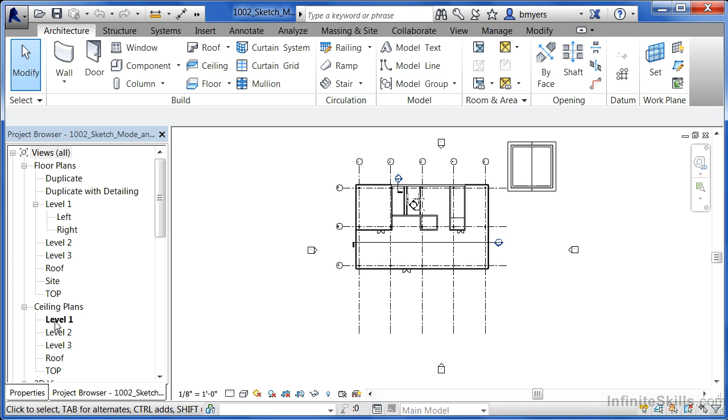Now, we're going to place a ceiling inside of this office area between A and B. To do that, we need to come underneath the Architecture tab and select on Ceiling. When we do, we need to look underneath Properties to see which type of ceiling it's going to place inside of the space. In this case, it's a 2x4 ACT acoustical tile system ceiling. Also, we can see the height, and in this case, it's 8 foot.

So if we place it in here currently, it'll be 8 foot off of level 1, or 8 foot off of the ground. In this case, I'd like it to be at least a little bit higher than 8 foot off of the ground. So I'm going to type in 9 foot, and we'll have a 9-foot ceiling inside of this office space. Now, if you move your cursor into this area, you'll see a red line showing up around the office walls. This is a good thing. This is where it's going to try to place the ceiling into.

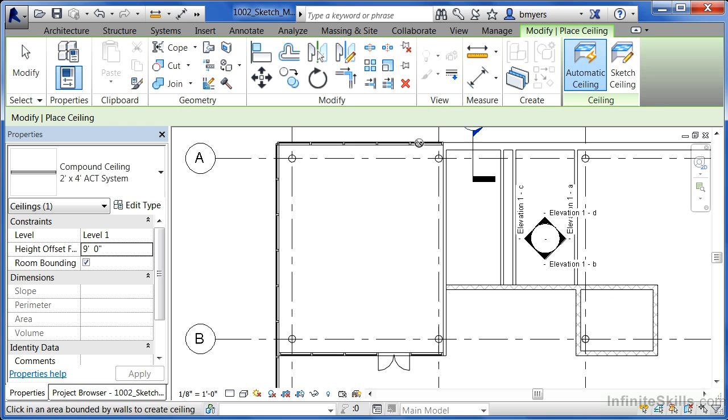Up here, you'll see this says Automatic Ceiling. What's actually going on here is that it's finding where those outside walls are at, and it's automatically placing this ceiling inside of this space. So it's making this decision for you. Do you want to place it inside of this space, or inside of this space, or inside of this space? In this case, yes, we want to place it inside of the office area, and by just clicking, we've now placed a 9-foot elevation acoustical tile system inside of the room.

Now I'm going to do the same thing, except over in these two spaces here. But these are going to be restrooms, and frankly, I don't really want to have ACT inside of my restrooms. I want a different kind of material. So I'm going to pick this gypboard material, the GWB on metal stud. And I'm going to change the height offset from being 9 foot to 8 foot 6. So we'll have a little bit lower ceilings inside of here. Now just click to place and do one more time over in the next restroom.

Initially, it looks like nothing has happened, but that's because in Revit, by default, and this can be changed, the gypboard ceilings don't have a pattern associated with them. Now, it can be assigned any pattern that you want it to have, so it looks like a bunch of little dots or maybe triangles or something along those lines.

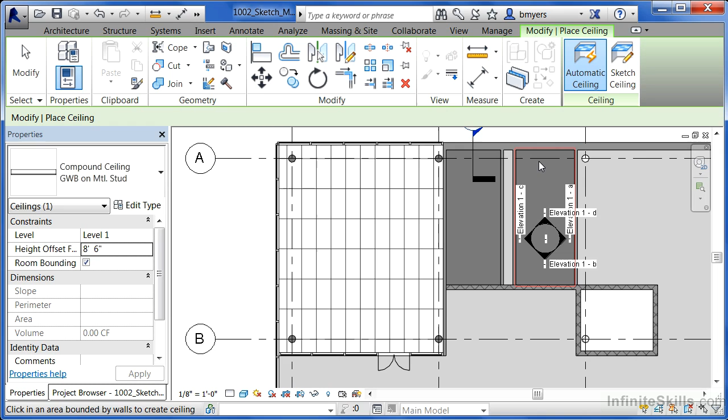But that being said, in order to see if these ceilings actually were placed, one trick is to move down here, highlight over Visual Style, and then change the visual style to be shaded. When you do, you should see this get a lot darker where that ceiling is going to be placed. As a result of this, you know that you're going to have ceiling inside of both of those spaces.

Next, I'm going to come over here and I'm going to select on yet a different type of ceiling. I could do the generic, or in this case, I think I'm just going to pick on this 2x2 ACT system.

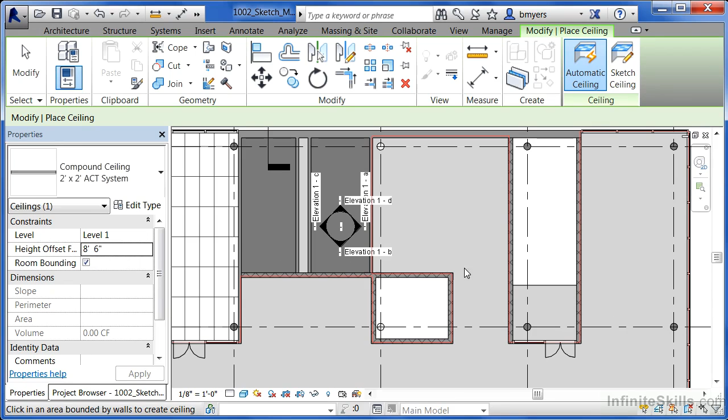And I'd really like to place it inside of this room, but I can see that I'm going to have a problem. I only want it inside of this space right here, not have it fill up this entire space out here. So to accomplish that, I'm going to have to sketch my ceiling in. So I'm going to come up here to Sketch and select on Sketch.

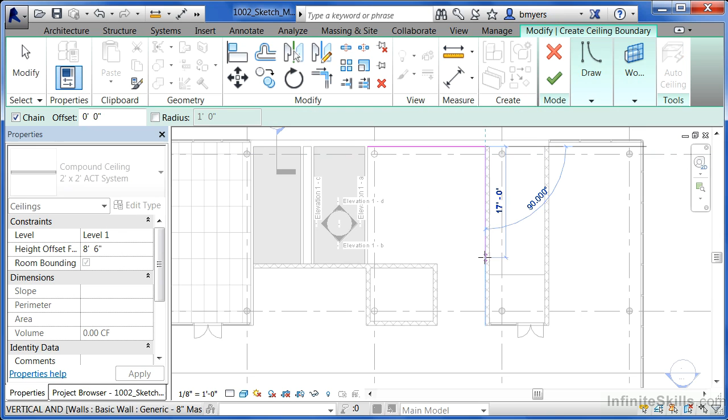Then I'm going to pick my Draw tools and use my line work to draw around where I want the boundary for my ceiling to be. One quick tip, if you move over here, just highlight over the intersection and move out, you'll get this dashed line. When you do that, you know that you're straight across from that wall. Move across, click, come back up, and click again.

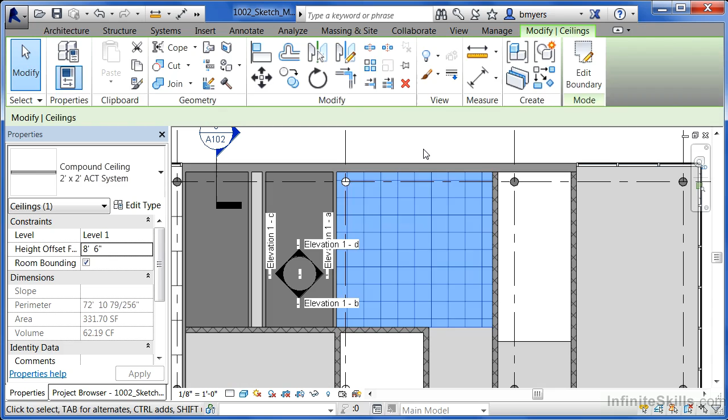Now at the 8 foot 6 height, I'm going to have this 2x2 tile put in here, and click the big green check mark to finish that off. I'm going to click out here in the white area, and now we can see we have ceiling in each of these spots. Now I'd like to go through the same process one more time, except in this case, I'm going to put a ceiling in this spot here, and I do want it to be gypboard again.

Going to do one more ceiling. Going to choose the GWB, the gypsum wallboard ceiling. And one thing of interest, you can see if I click right now, it's going to put a ceiling right into this space. The problem is it'll try to cover up this ceiling here. But really I have one of two different options. I can either use sketch ceiling and take the time to pick each and every one of these walls,

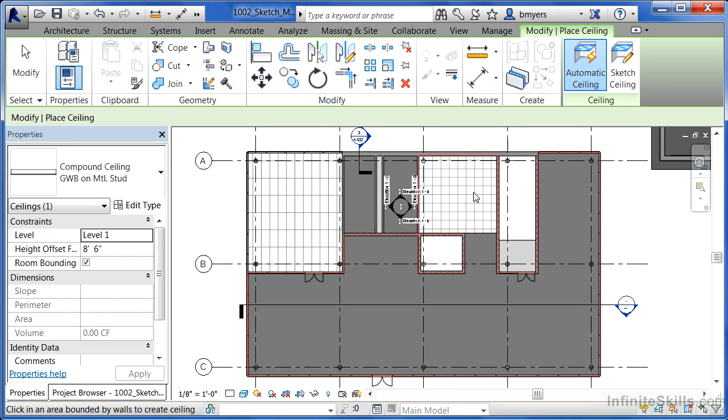or, to speed things up, choose the automatic ceiling, accept this height offset. 8'6" sounds good to me right now. Click right inside of the space. We can see this is all turned gray. But even though this pattern hasn't changed, I can tell you that there's actually 2 ceilings inside of this space. I'm going to hit escape right now.

Now I'm going to put my mouse over the edge of where I know a corner of the ceiling is at. And I'm going to select on the tab key to try to select my different ceilings. Now in this case, actually my ceiling is coming in here, so I need to pick a different edge. I'm going to pick the edge right here. I'm going to click the tab key until just that ceiling highlights.

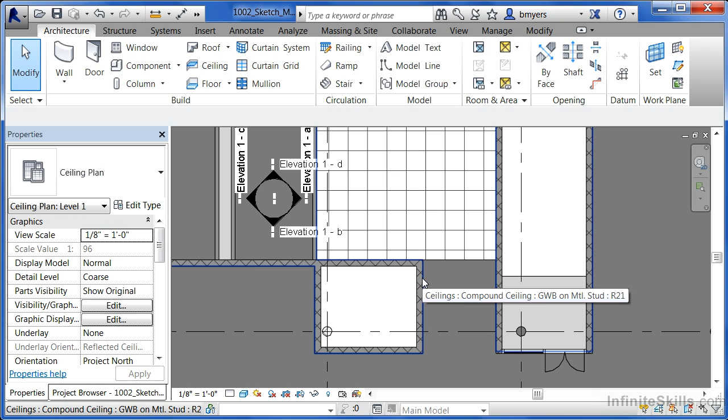And you can see that in the lower left-hand side of the screen, it'll say ceilings, compound ceilings on the gray bar going across the bottom. When you click, it'll highlight. You can then do an edit boundary to this. And at this point, it gets easy. Because all you need to do is use your draw tools, pick a line, and draw one line over.

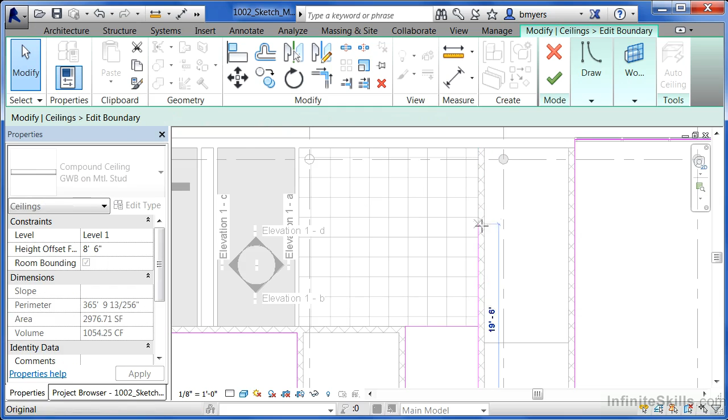Hit escape a couple of times. Highlight on each of these lines. Click the delete key to get rid of these extra lines. And with this final line, you can select on it, click the dot, and pull it straight down, and click the big green check mark whenever you're done. When you do that, you'll then have a ceiling just in those areas.

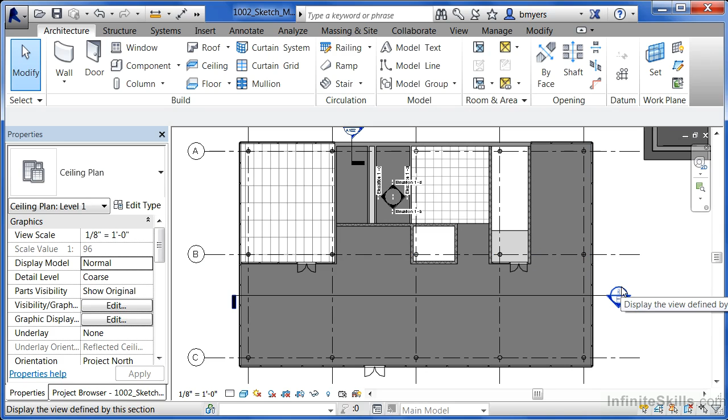And even though that seemed like it was a lot of clicks, it was a lot less than clicking each and every spot going all the way around the room until you went all the way around in a circle. Now we have a ceiling in each of these areas. And we'll be able to see that, particularly over here, if we double click on this circular area here, which is a section going through our space.

This is a section. I'm going to click right here on the visual styles and turn this to shaded. And here's that ceiling, and here's the floor up above, and we can see the space in between those areas. And we can see that ceiling going all the way across in our building.